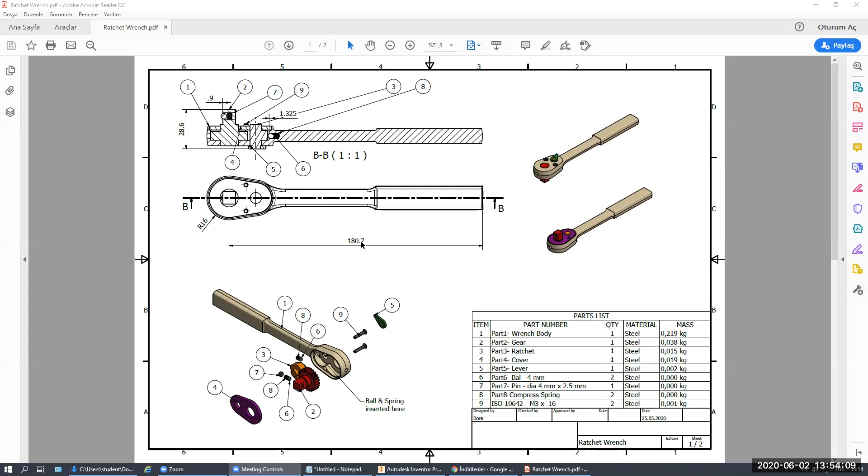I will just start the modeling. We have a sectional view here, the sectional view, and we have some dimensions in our figure. The first thing I'm going to do is create the model of the wrench body. I will just zoom in and have a look at our part here.

We have a draft angle projection here. As you see, when we have an extrusion, this extrusion goes sideways. We have a 7 millimeter - I mean 7 degree - draft angle according to the extrusion direction. This is our extrusion direction, and we have 7 degrees draft angle starting from the center point.

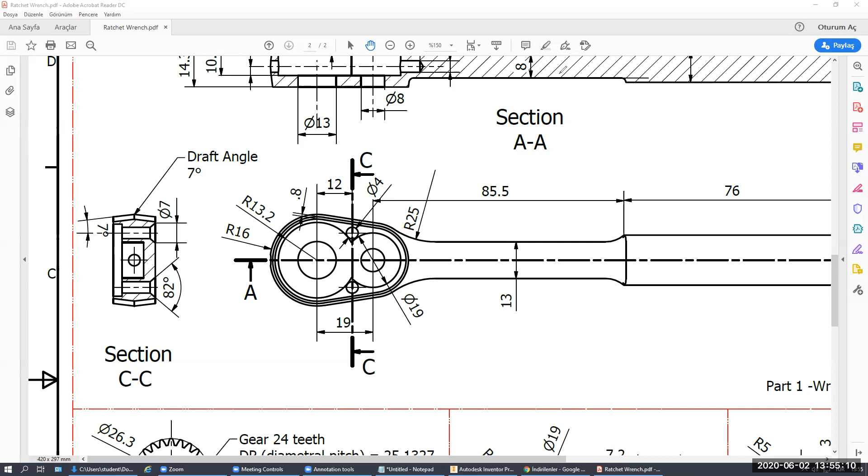As usual, I'm going to create a first sketch which represents our part. I will create a new sketch representing the main dimensions, then create some dimensions and other things according to our figure. I'm just going to adjust my sideways - I'll take the left side as our figure and right side as our Inventor software. I will again adjust some dimensions.

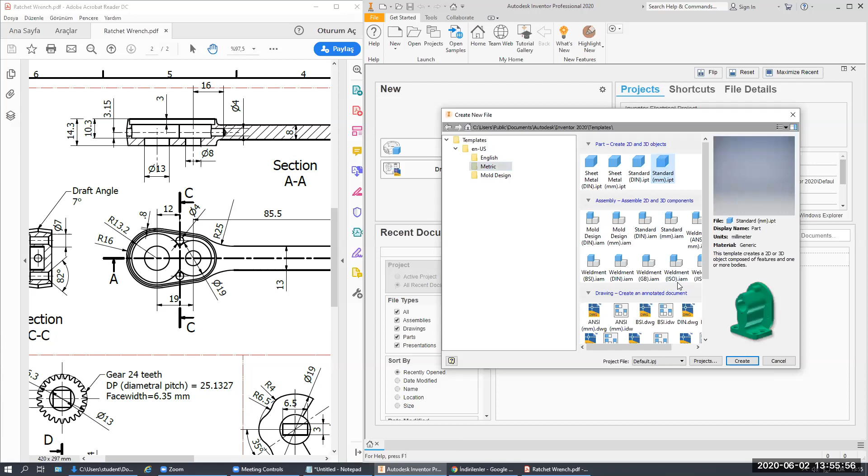Open a new part. This is a metric part - actually it was an inch part, so I have changed the dimensions of these parts. I will just start a new part. As usual, I'm going to select a center point for my figure, and I will choose this point as my center of our wrench body. I will just save.

I'll just choose this point as my sketch origin. Save my part file to the desktop. I'll create a new folder, Ratchet wrench. Sketch. The part 1, the wrench body.

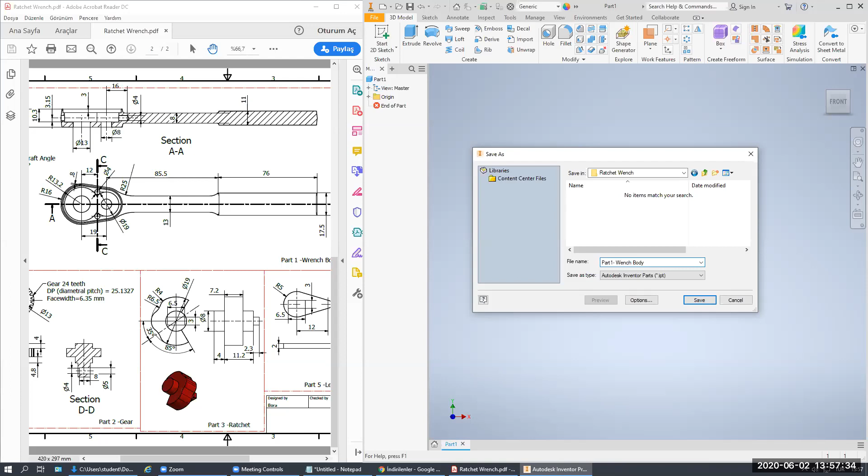Let me enlarge this folder just to see the visibility of the XY plane, to open the XY plane and center point visibilities. I will start a sketch on the XY plane.

The first thing I'm going to do is create two lines representing this center line axis. I will create two lines arbitrarily, having horizontal and vertical constraints. As you see, we have a horizontal constraint, and as you see, we have a vertical constraint. Here, I will make this line coincident at the origin point, and this line at the origin point as well.

What I'm going to do is create the dimensional relationships. These lines I'm not going to use directly - for this purpose, I will convert them by right-clicking and selecting construction. I will create one axis for this axis.

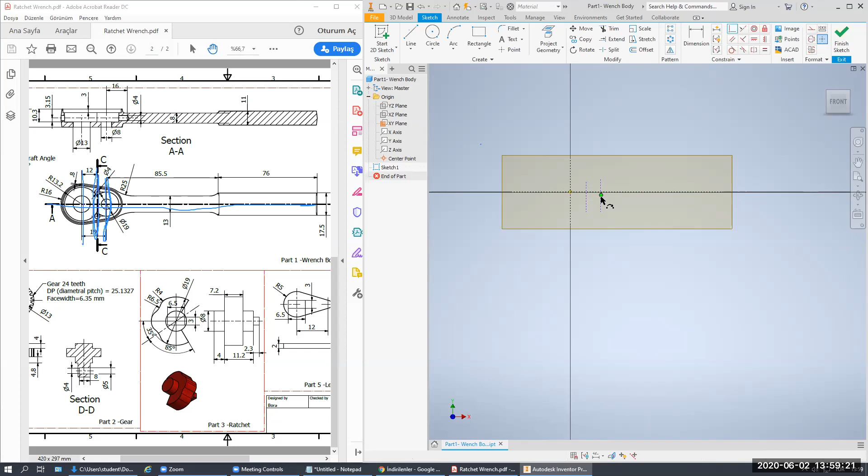You see, we have another center point here. Also, we have two bolt interfaces here. I'm also going to create a new line and make this line construction, and make the midpoints of these lines on these points. Here, I will create the first dimensions: 12 for this dimension, and we have a 19 from the point of origin here - 19 here. I will clear the annotations I've done so far.

I will just go inside to show you better what details we have. We also have some details - as you see, we have some dimensions and relationships.

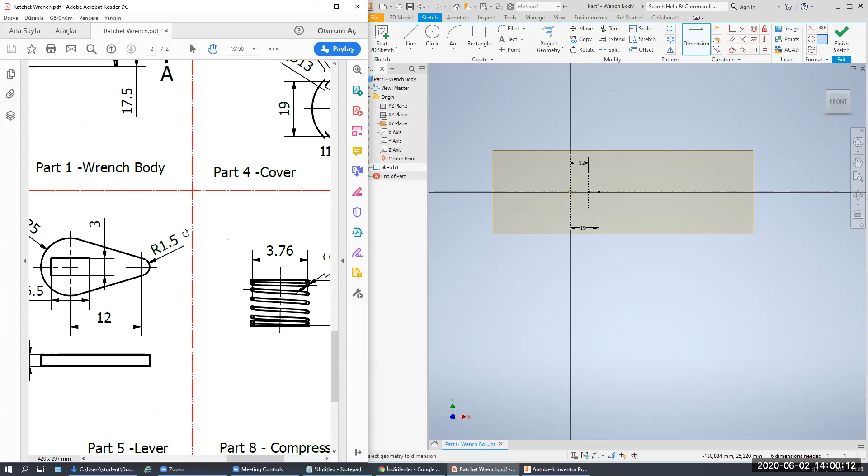Actually, I realized I have forgotten - we also have the bolt center dimensions, which are 19 millimeters far from each other. What I'm going to do is create an axis having a center point with the radius dimension. Right click - I have 16 millimeters. This is the dimension which I have seen here, the dimension I have created so far.

The next thing, we have another point here having these dimensions, also other critical dimensions.

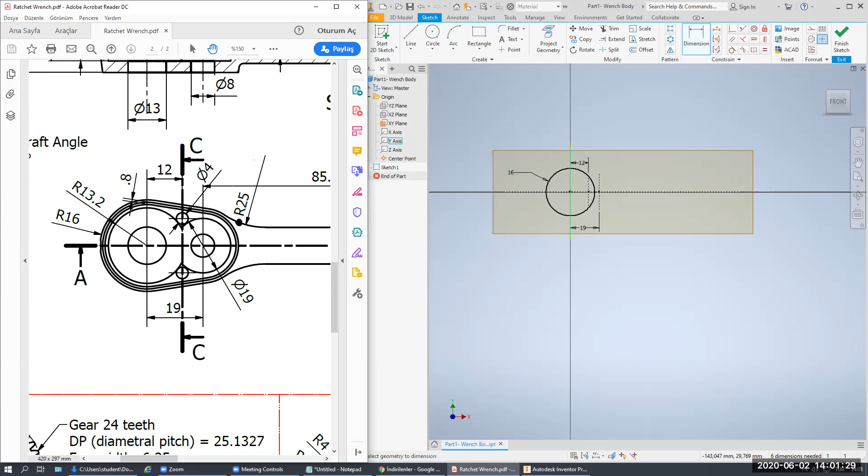We have a 16 and also some other dimensions so far: 19 millimeters, very much in thickness. We have 13 here, we have 19 here, and the offsets for all parts which just have those dimensions so far. Also, we can take these dimensions from the part of the cover of our wrench body.

Here, what I'm going to do is create another axis, which is 19. I will just zoom in and have this line, intersection, and I have this side. We have the diameter, it is 19.

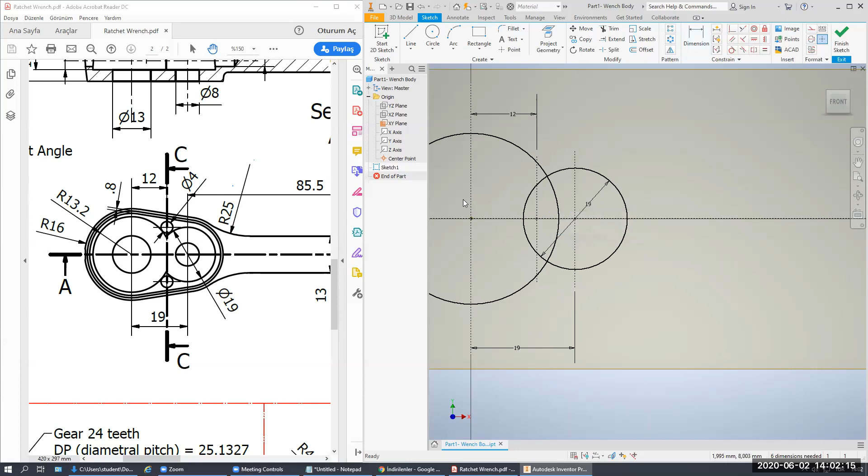And from the wrench body, we have an 11 millimeter radius and 14.2 millimeters. This is the body dimensions, and these are the cover dimensions. Also, we have some other details here. I will also adjust this one with the dimension radius 13.2 with the radius side.

And these lines, these circles are connected to each other, and we have parallel dimensions. These are the offsets of our body parts. I will just clear. This is the other outer dimension here. I have a tangent condition at this point. I will trim. And also we have 14, this is the 16, but we have...

14.2 millimeters. I will just create 14.2 millimeters with radius dimension. This is my 14.2 dimension. And also I will just delete this one.

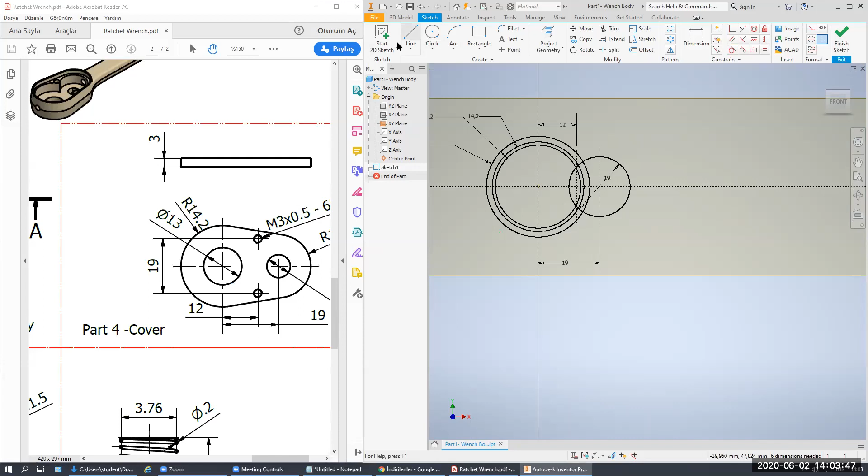Also for the inner part we have 11 with radius. Also these two circles, this one and this one, are connected with a tangent line. Again, tangent, this line to this line. We have just trimmed the unnecessary parts, so this part is also unnecessary.

We also have another dimension, as you see. We have 16 with 14.2. And for this, between these two circles, we have a distance about 1.8 millimeters. I will do the same thing for this circle and give this dimension, which is 1.8.

Also, we have another tangent line between these two circles. We have a trim dimensions. We have the same dimensions on the other side, but I'm going to use the mirror command for other circles. I will use this line as a mirror line and take to the other side these two tangent lines. I will use the mirror command, select this line as the mirror line, this line, apply and confirm.

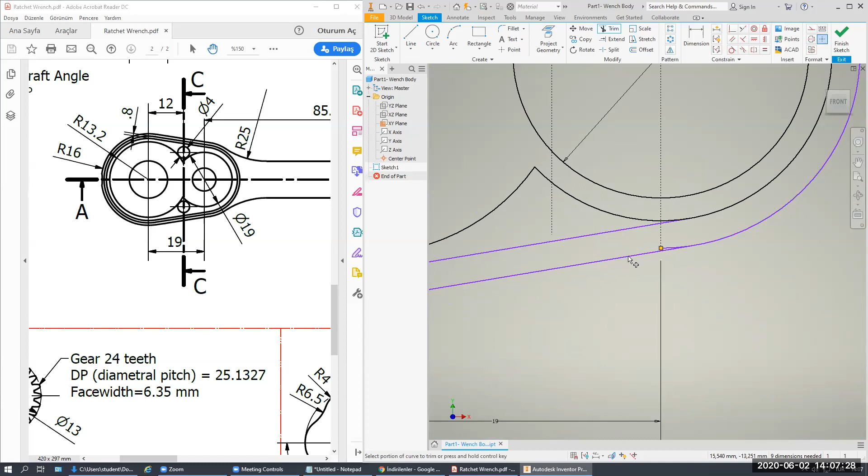Again, I will give the dimensions that I have. This one, also this one. I do not have any dimensions. Okay, this is a dimension. I'm sorry, I have just made a mistake here.

I will just make a trim. Also, this one I'm not interested in. I will extend this circle, and make the trims for unnecessary parts.

This is the internal feature, this is the outside feature. Also, we have two small circles which are here. As you see, we have two small circles. Also, we have two other small circles in this one.

The dimension between these two circles is 19, but they are symmetrical around this line. This point and this point are symmetrical around this line. And the dimensions of these holes are 4 millimeters. Also, I would like to just make it equal for the other side.

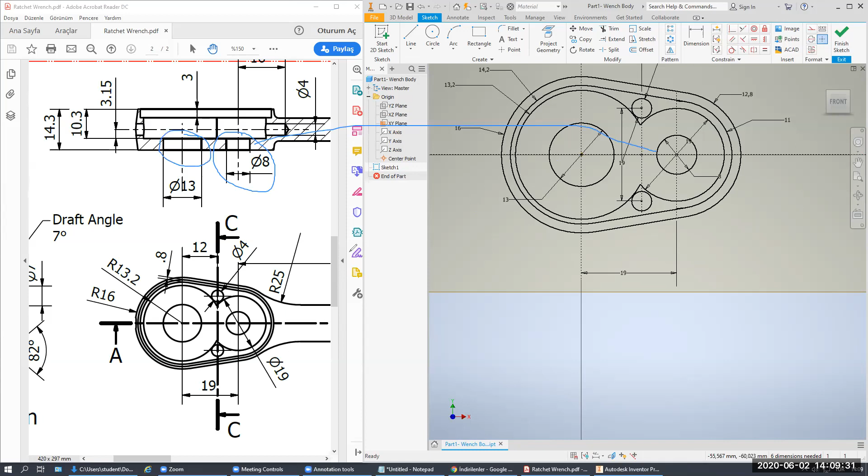We have all other details for our wrench body. From this point, we will have a continuation. From this center axis, we will just go 85.5. I will just draw two lines.

Also another line for representing these two lines. These are the lines that will be used for our sketch. Here we have the thickness for 13 millimeters between these two. I will give this distance 13.

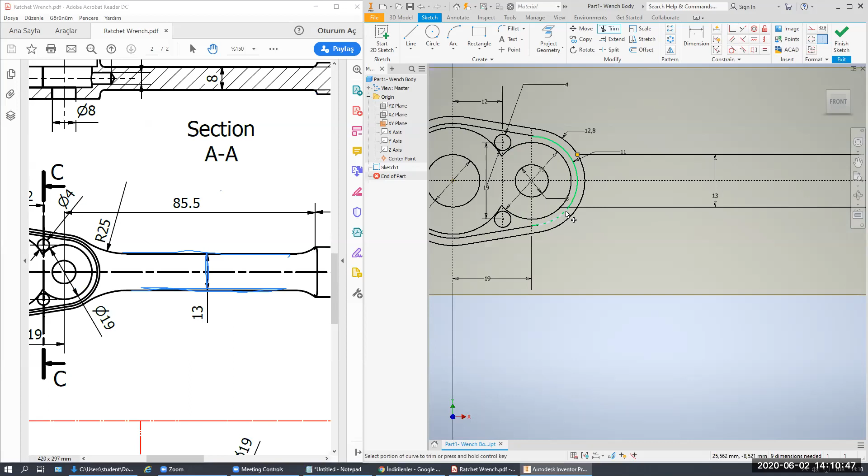And as I say, it's moving around this one. To prevent this, I will just use a symmetrical constraint around this axis line. This is symmetric around this line. And I will just trim the unnecessary parts of these two lines.

And this line is interrupted with a new line, which is 18.5, 85.5 millimeters far from this circle center. For this, I will extend these two lines, and I will just make the trims for our figure.

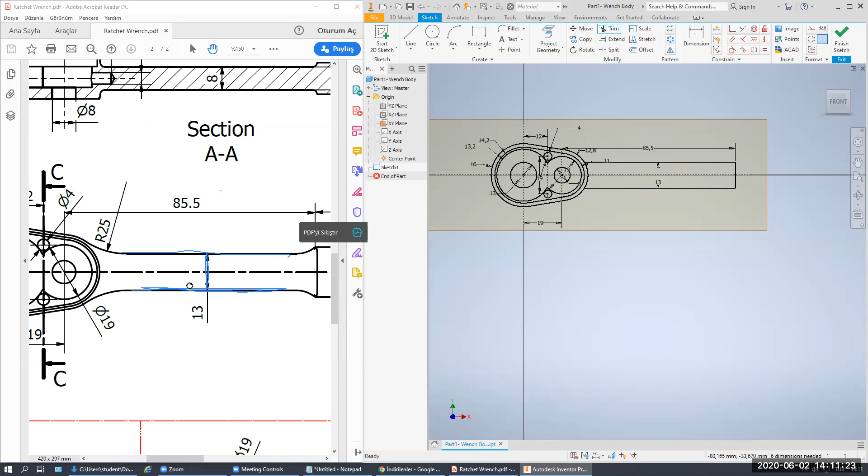The next thing, we have the handle part, and this handle part has a variation about its thickness side here, which is 17.5 millimeters. I will just clear all my parts here, and I will create, this time I'm going to use a rectangle, and I would like to keep the midpoint of this rectangle at this point.

And our rectangle shape is 76 millimeters in length, 76 millimeters in length, and its thickness is about 17.5 millimeters, as you see. Okay, we have just created our body part here.

Sorry, this portion. Okay, this is a sketch that we would like to create so far. This is our wrench body, and we will just create the sketches so far.

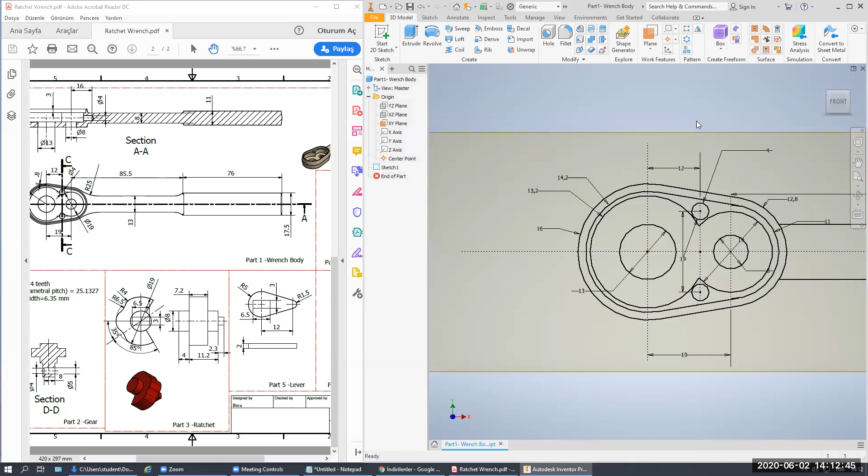Here we also have a small thickness inside, which is 0.8 millimeters. For this purpose, I will go inside and make an offset about this point. As you see where I made a mistake, I will correct it. Also this line, I will offset, and this offset distance between these two lines will be 0.8. Okay, this is our wrench body sketch so far.

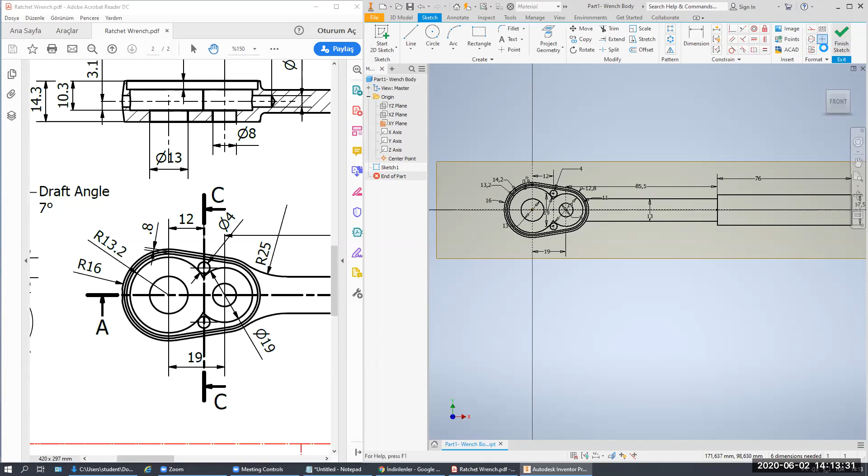Finish my sketch. What I'm going to do is the head of this wrench is 14.3 millimeters. I will select every single item in our sketch. For this, I'm not going to disturb this one.

I will create a new sketch on the XY plane and take the outer geometry of this circle body, which I have just created the projection. I will use this sketch for extrusion purposes.

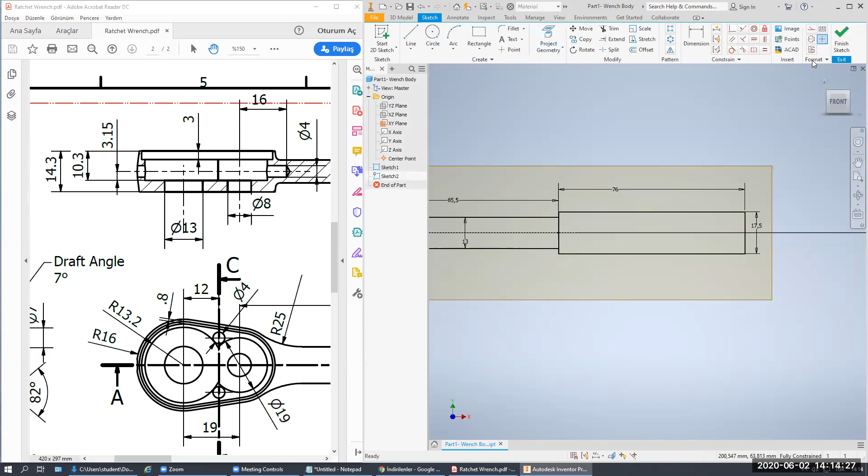Again, I will right click and open the visibility. I will again use these two lines and the rectangle on the end of this part. What I have done so far is this one.

I have created three different sections. We have three different sections: the head part is 14.3, the middle part is 8, and the handle part is 11 millimeters. We have all our details on the sketch.

For this, I will simplify the sketch for extrusion purposes. Finish my sketch. I have the extrude tool. I will select the head part and use a symmetric condition.

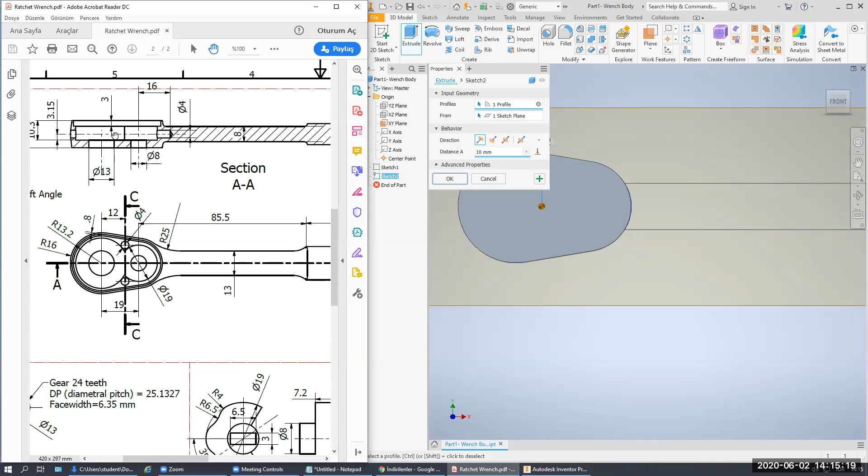This time I'm not going to use... I would like to keep my sketch on this surface between these two surfaces. I will use the symmetric condition and change my dimension to 14.3.

When I use this sketch in an extrusion feature, I will lose its visibility. To use it again, you have to share by having this visibility option on.

Again, for the midsection - I'm sorry, I made a mistake. For this extrusion, we would like to create a taper degree to have a shape with a draft angle. This is for forging and also casting purposes.

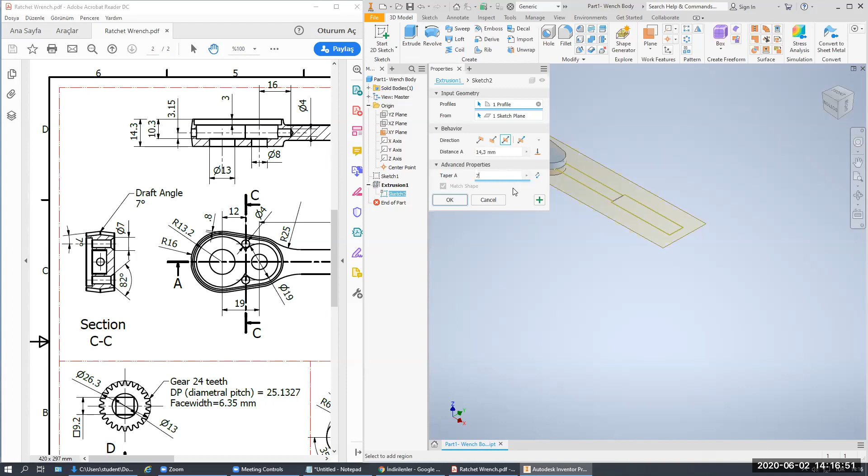We have created these angles to cover from the molding part easily after the casting or forging purposes. Here, what I'm going to do is make a taper with a draft angle. It is normally called 7 degrees here.

To show you what I'm doing, as you see, I have increased from 0 degrees to 7 degrees. But this time I am enlarging these top surfaces. For this, I will use the flip down direction.

Here, as you see, we will make the extrusion to inside with the draft angle, which you have seen in this point. As you see, we have a draft angle to outside and a draft angle to inside.

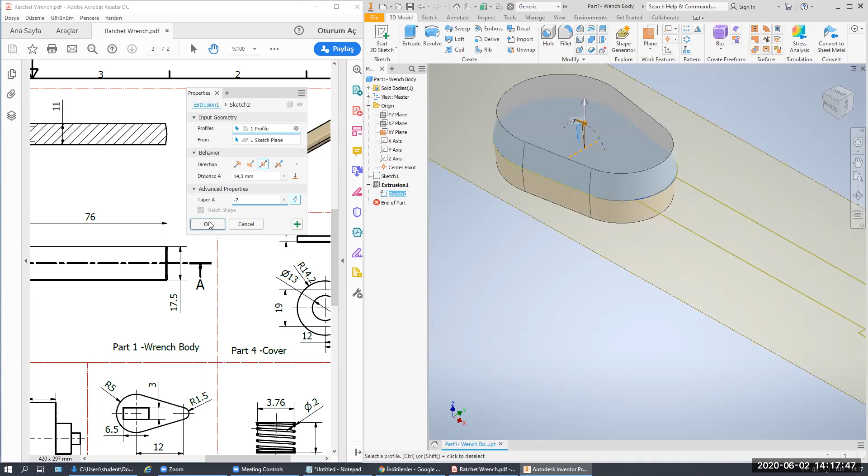As you see, you can also give this flip direction with -7 degrees. Okay, I will use this again for the midpoint.

I will use this midpoint, and the thickness of the midpoint here is 8 millimeters. It is an 8 with a 7 degree draft angle, with symmetric condition, and I will change the direction of this flip to inside. Okay.

Next thing, what I'm going to do is, as you see, when you give the draft angles, the connection between these two items got lost. We will heal this portion by filling a normal extrusion rather than the draft angle here. We will complete these items so they're not too drafted.

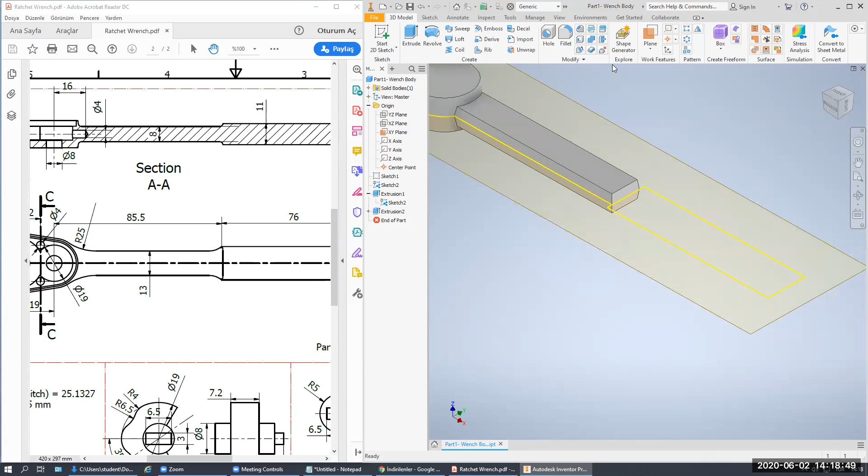We can also use this draft angle for giving the draft angle properties to our solid. For this one, we are going to use the last section with this draft tool, by using this draft tool.

We have, as you see, 11 millimeters in thickness, the last handle point. I'm not going to use a taper angle. I will use the draft angle.

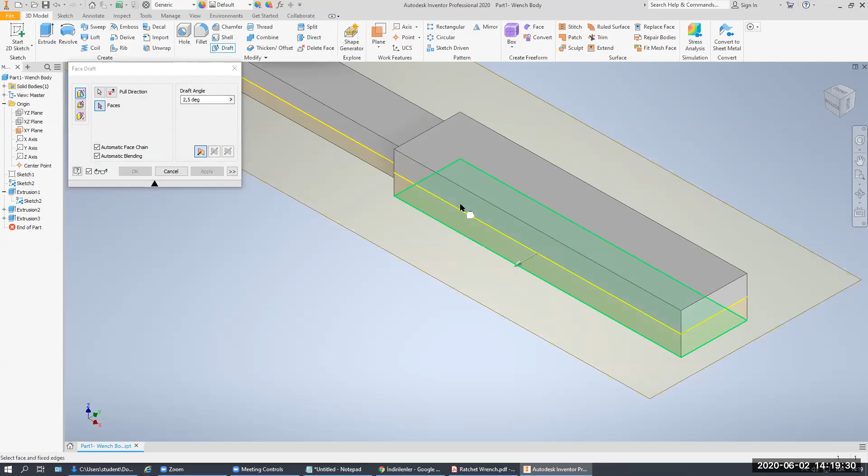This surface, and this surface - as you see, we can give draft angle. I'm sorry.

Again, just choose - this is the fixed edge, this is the fixed plane. We have many options: the parting line. I'm going to use this one. The parting surface here, it is the parting tool, and the pull angle direction to inside or outside.

The faces that I'm interested in are the inside. As you see, it is just going outside. The inside with 7 degrees.

I can just change the direction to inside or outside like this. Okay, you can choose the symmetry line. Again, 7. You can also change the angle here by giving the minus sign.

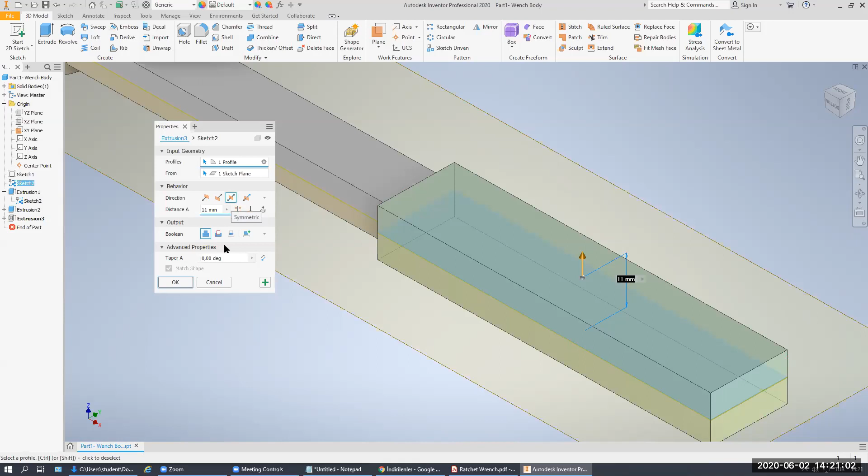About this feature here, starting your sketch on this surface with the F7 tool, I can just create a new rectangle tool just to heal these two portions.

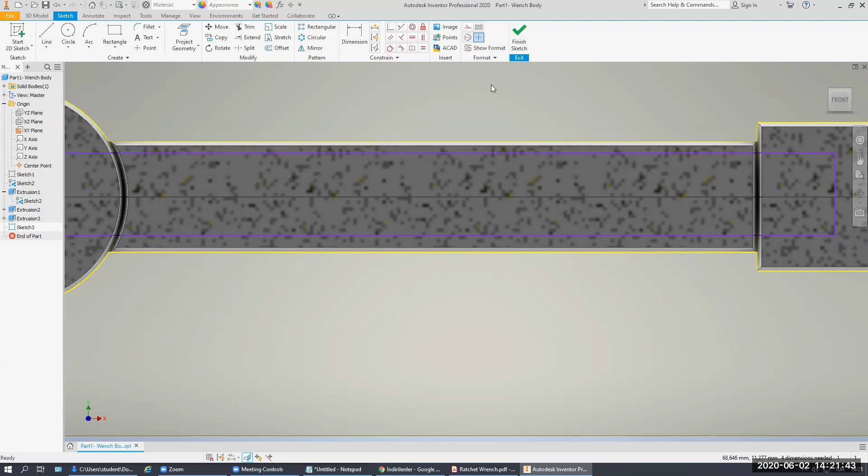I will use these portions to heal the connection between these lines. Also, I'm sorry, I will just take one back. I will use these geometries to heal the sections between the items.

We have some other tools. We will just create a circle tool. Also, I would just like to have a line. I will use this cross line tool to heal my figure, which I have.

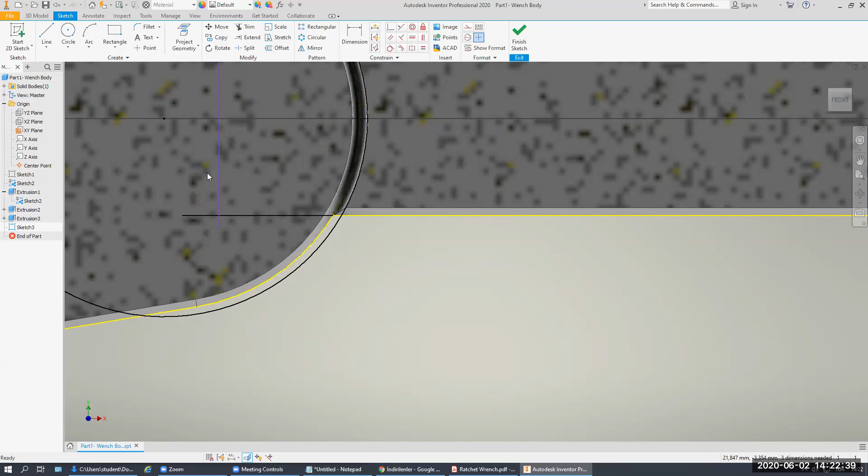From this point, I will use this point, this line here, here. I will just trim unnecessary parts.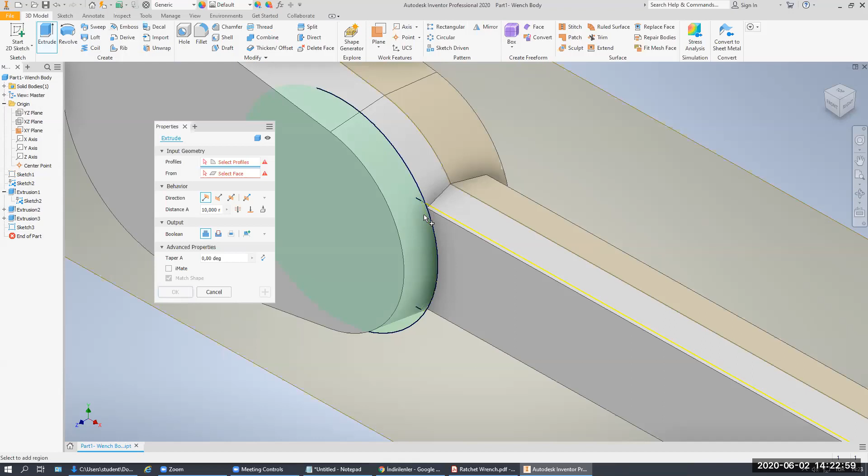I will use this first outline, I will use this portion for extrusion purposes. What I'm going to do is I will just create an extrusion tool inside. I'm sorry, again, I will just use.

Trim unnecessary parts. We have the F7 tool, I will use inside this figure here. Extrude tool. That's the first sketch using these. Extrude tool.

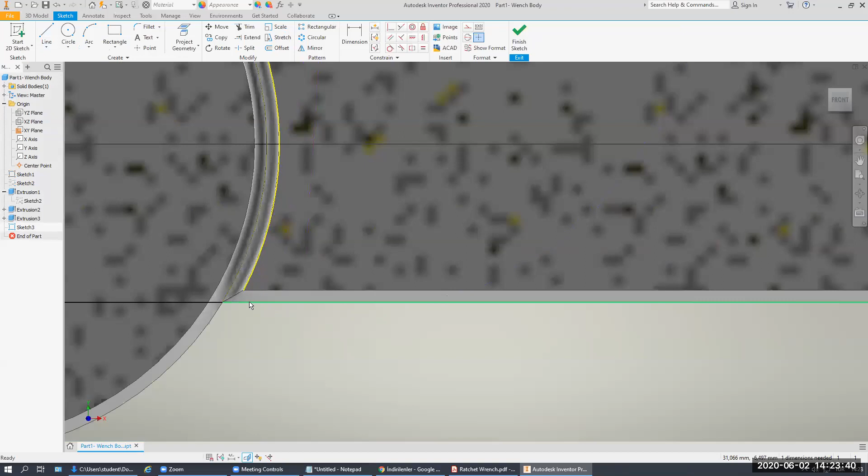Something upon this, we have the F7 tool. It's closed, this is not closed as you see. Project geometry, I will just close this one, and this geometry will be closed. Trim operations.

Okay, now the extrude tool. This time I will just heal the connection between these two portions.

Next thing, we are using the section tool up to the XY plane. I will just check to fill the gap inside. This time I will use the F7 tool, minus zero. Let's keep this distance to be 8.

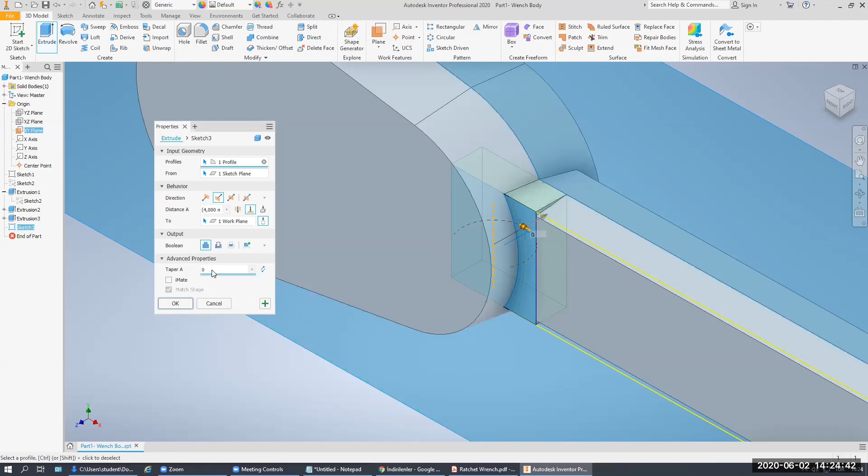I'll just connect these two lines, or you can just make a new extrusion between these two items. We have just done this time separately.

We can just, for these connections, we can just create the F7 tool. We can just connect two items. And this time I will just redefine and move this section to inside.

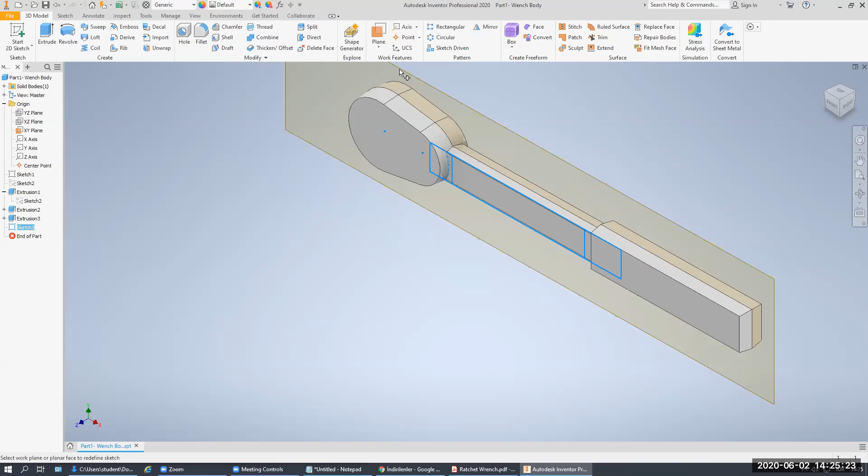We have the extrusion tool, and I will just heal the gaps, which is 8 millimeters. It's symmetrical with the draft angle 7 on each side. Just flip the dimensions, and I will just heal the connection between the items.

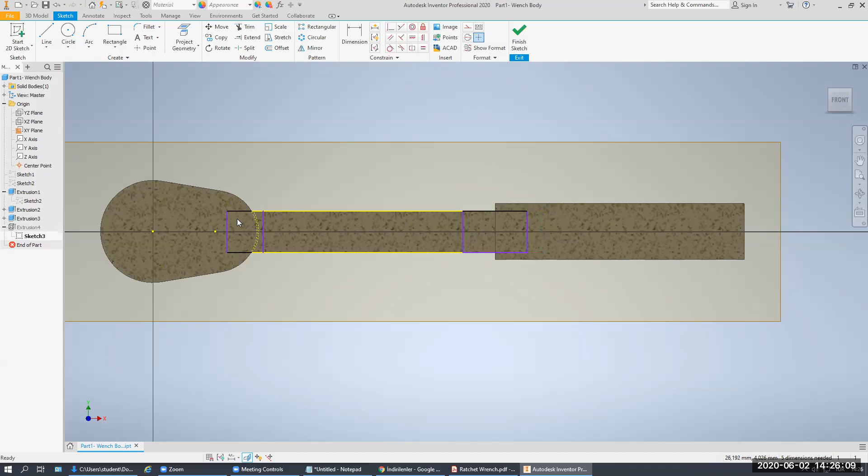As you see, when I just gave the extrusion here, we have just lost the connection separately. For this, I will just create a new extrusion to heal this connectivity. I will just use 2 rectangles to make them connected to each other.

The next thing, what I have is a fillet on each side, as you see. I will just use the fillet tool. I will change the dimension to 25. And this one, as you see.

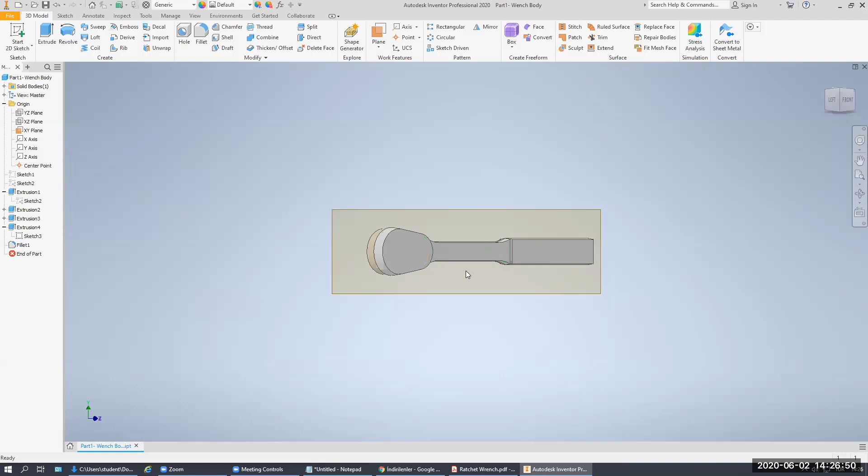Also this one, you see, on the other side it's not applied. Do that out, also this one. 2 fillets. When we look from the top side, we have 2 fillets.

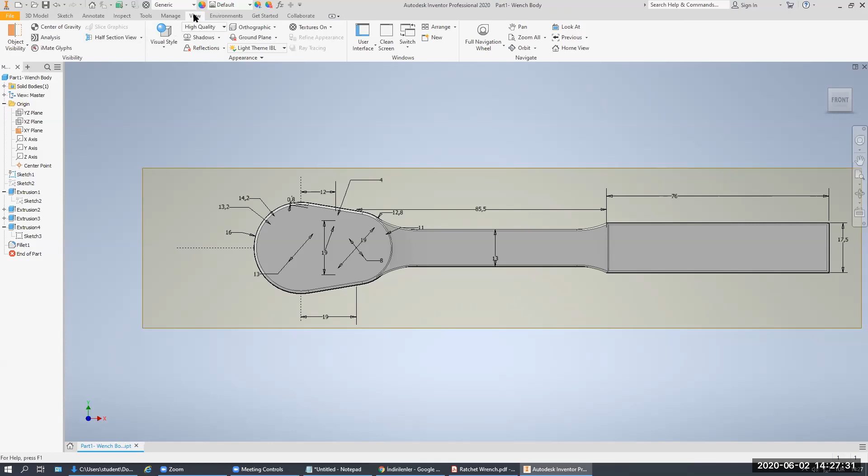What I want to see better, I will change my view from the view tab to the half section with the XY plane open. The next thing, I will just clear everything inside. I will just have an extrusion tool.

I will just create an extrusion cut, this time cut with a through all section. But this time I want to be sure that everything is clear in my section. I will change the half section view to an end section view. As you see, we have an outline in our figure.

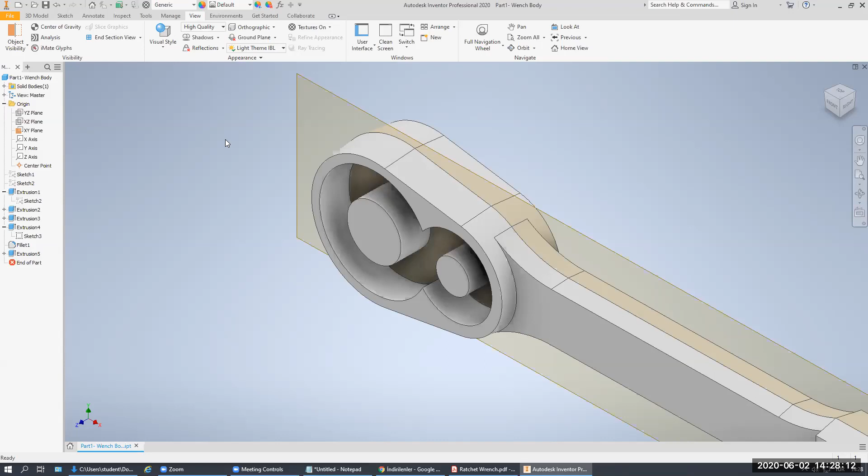Here, what I'm going to do is I will just again use the same sketch feature here to have the outline which our cover just sits on. For this, I will just start a new sketch on this face and hide the body to see my sketch here and have the geometries.

This is the circle for our body part. I will just get these parts. Okay, we have a thinner inside and the outside for our figure.

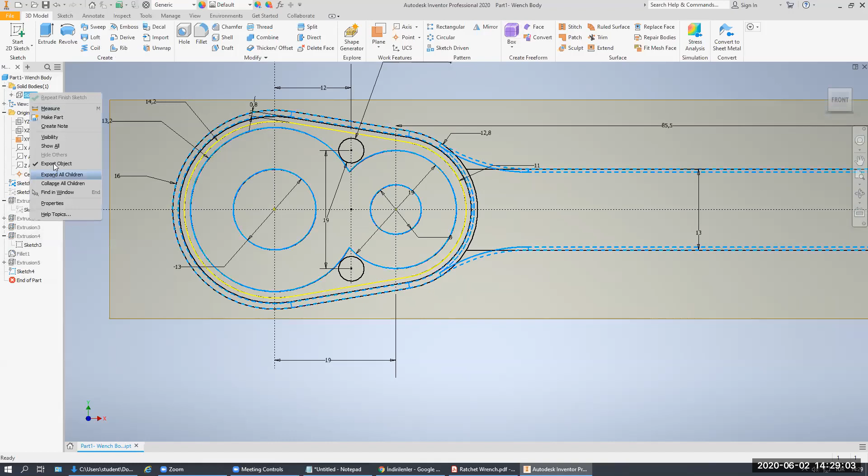We will just finish my sketch, open my second visibility body. I will just create that sketch on this surface. And I will just create a new extrusion tool, and this time we have a 3 millimeter thickness for our body part. I will use this figure with 3 millimeter thickness and change my direction to inside. It will just make a cut for my purposes.

Okay, the next thing, what I need is, we have 2 holes on our figure. Again, do the same things. I will just start an extrusion.

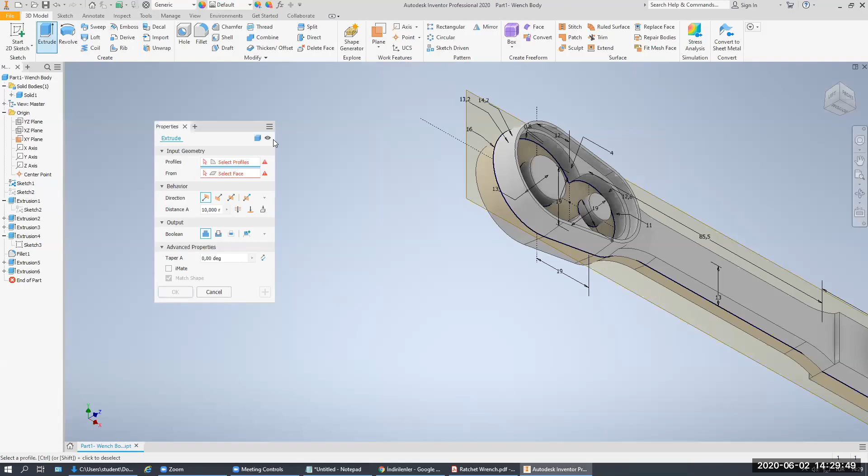Use these 2 circles with symmetrical and through all, but this time I'm just going to make a cut, to make again symmetrical condition to have also a hole on the back side as well.

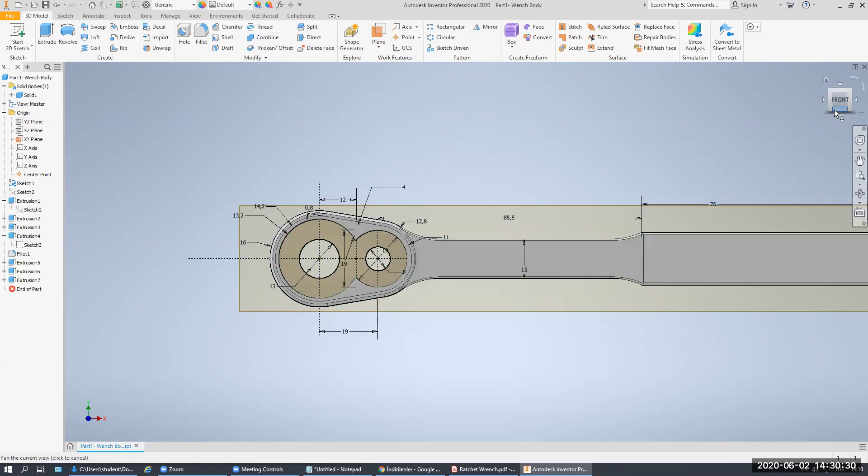The next thing, I have 2 holes for both connections, and as you see, we have 2 small holes, but the holes start from the back side of the figure. For this, I will just start a new sketch on the back face. I will hide the solid body visibility, project the geometries to get the points on the back side of our part.

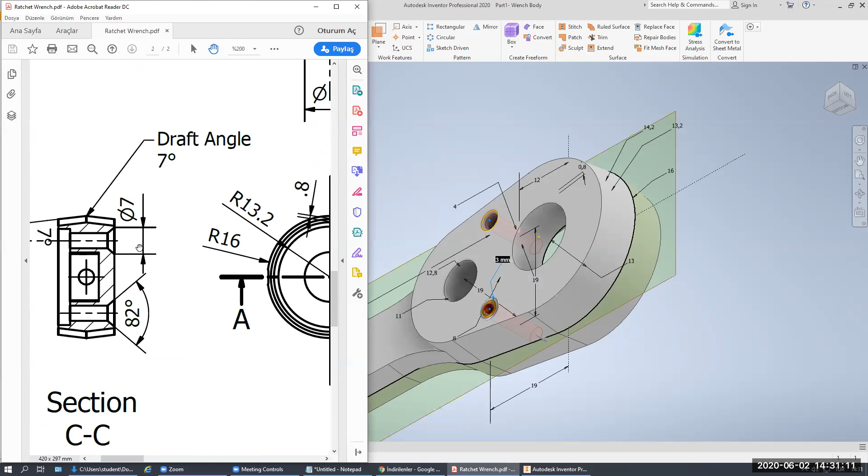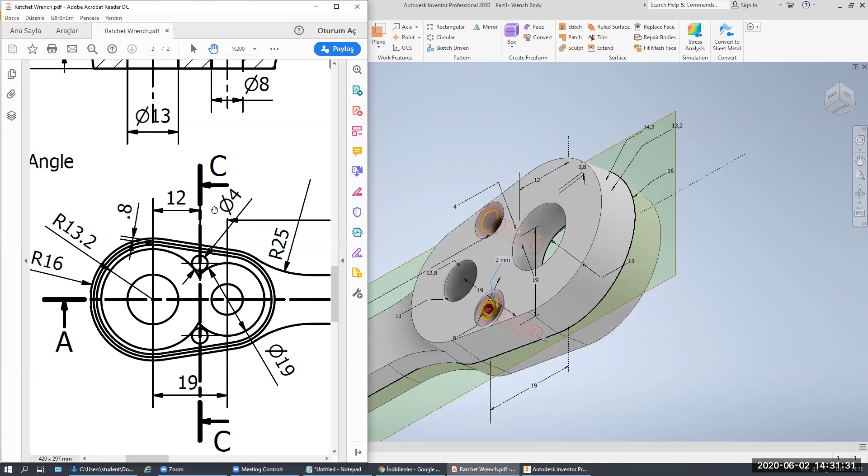I will create 2 holes at this point and this point. We are starting with a countersink, and our dimensions of these holes, as you see, we have 7 millimeters with 82 degrees - it is not 90, 82. This is 7 millimeter in thickness. Our hole dimension, as you see in this figure, is 4 millimeter.

Okay, the next thing, what I need is, I have some details about this part. As you see, we have a hole feature. Also, we need to just simplify this figure up to somewhere here. We use the midpoint, but we would like to be sure about this.

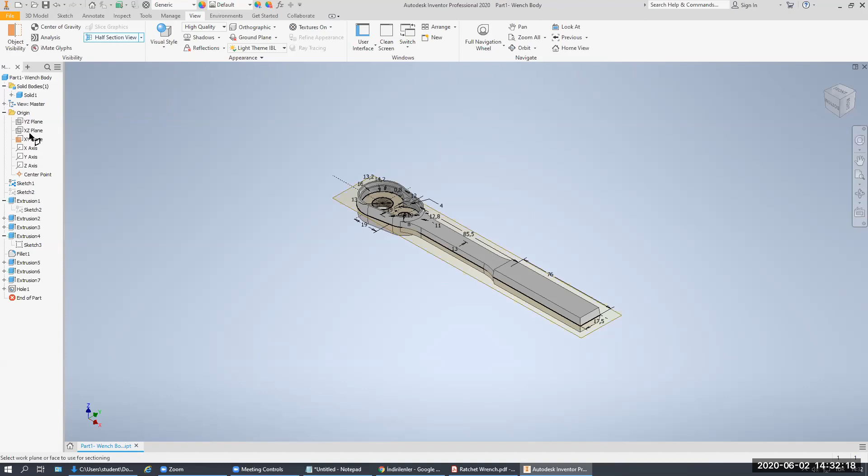If this is 10.3 millimeters - what I'm going to do is, I will just begin at the half section. At this time, I will use the XZ plane to check my figure.

As you see, we have some missing dimensions. When I compare these two figures, as you see, we have a missing cutting point here. For this, I will just create a new extrusion up to, from the top point, up to this point.

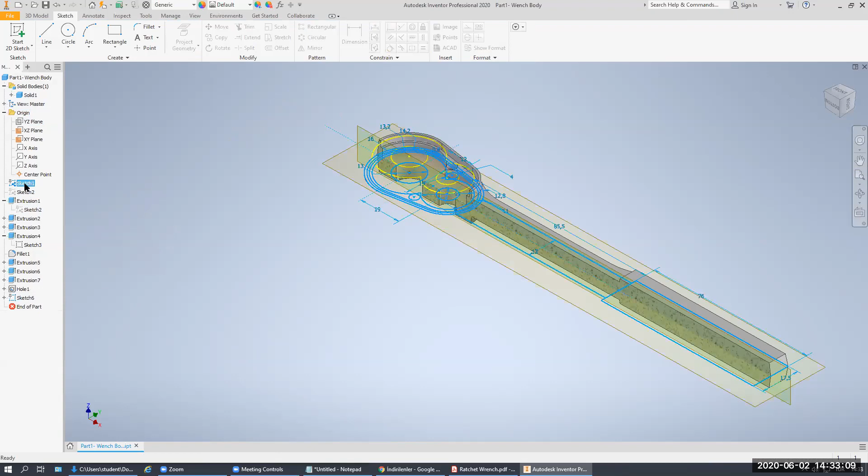Again, I will just create a new sketch at the top of this one, and I will use the same geometry which I have so far. As you see, I will just close my sketch visibility and have all the sections to be extruded.

This section, this one, and to be on the back side, and point 3, with a cut properties.

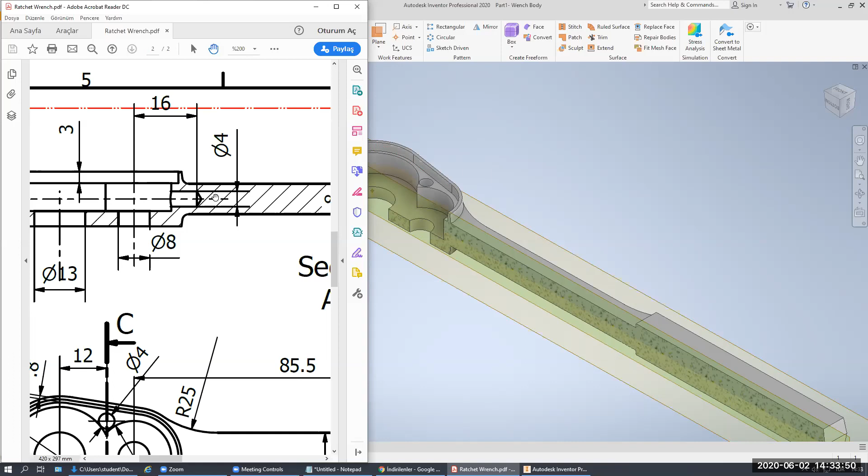Okay, next thing, what I need is, we are almost done with this part. We have a 3.50 millimeter far axis up to this point. We have a 4 millimeter diameter hole, which is 16 millimeter far from this one.

For this, we have two options. You can just create a new sketch and have the revolve tool. For here, I'm just going to use this line and create a midpoint line - a line passing at the midpoint of this projection geometry. It is at the center point of our figure.

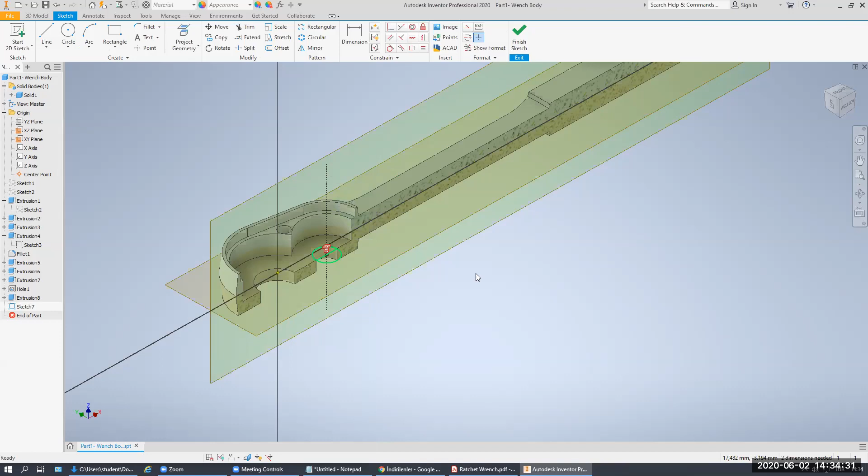I'm not going to use these lines, also construction. We have a line - this is our center axis line. I will just delete it. And this center axis is 3.15 millimeter far from this bottom line.

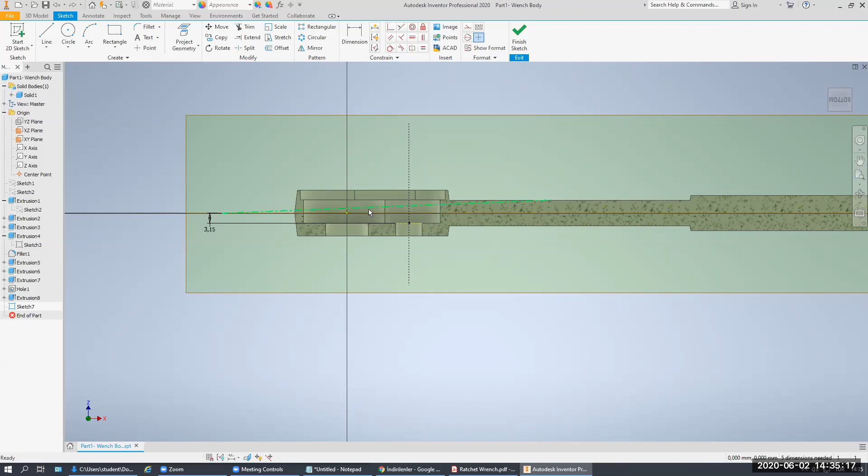It is 3.15, I'm sorry. I will just use this endpoint to give this line 3.15 far from this one. As you see, it is not horizontal. I will just use this vertical - I'm sorry, this horizontal line.

And I will use geometry, something like this. You can also create a geometry, something like this. Also, you can just use the mirror tool, using the mirror line. You can just engage this point on this line.

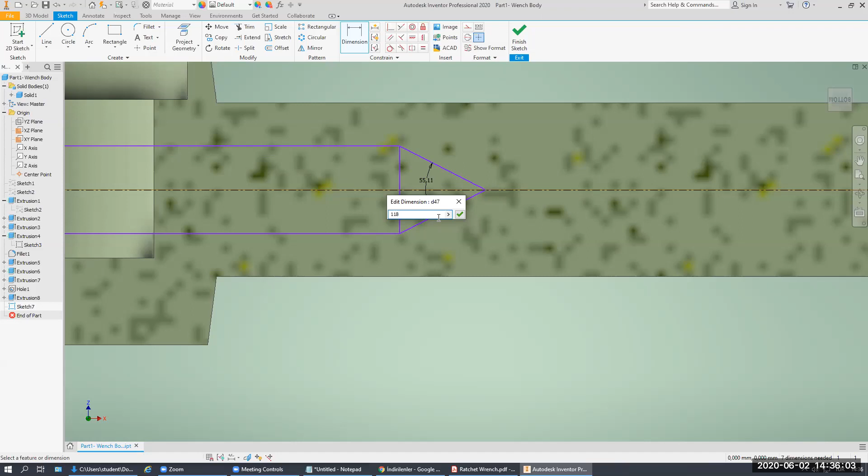As you see, the midpoint, the angle here for the drill angle, which is 118, and we have a dimension - as you see, we have a dimension with 4 millimeter, which is this one. We have a 4 millimeter diameter.

Now the drill goes to 16 millimeter far from this line. We have that line, and this line is 16 millimeter. Also, it is just up there.

Here, I do not need this part. This is a solid part. I have not converted it to construction. I will use only this section.

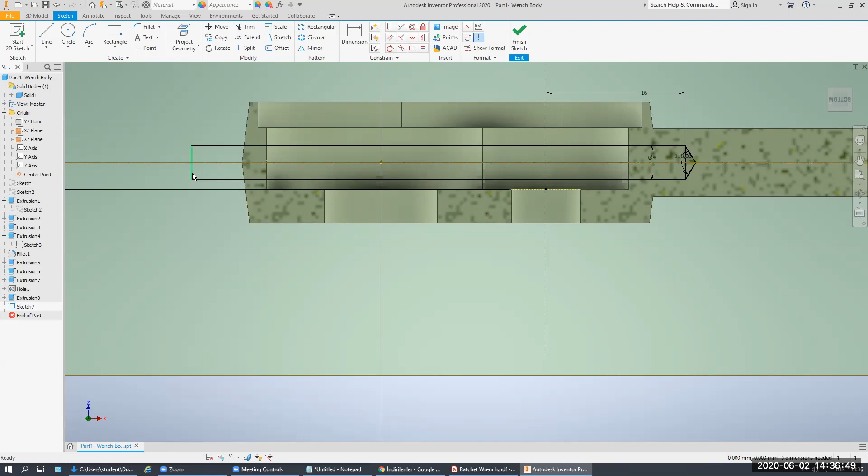For this, I will just make the pins, some dimensions. Also this one. Also convert this line, this to lines, construction. I will use this outline to be revolved around this axis.

I have the revolve tool. Select this profile, do not forget this one. Now this line, and I need a cut to revolve process of our figure.

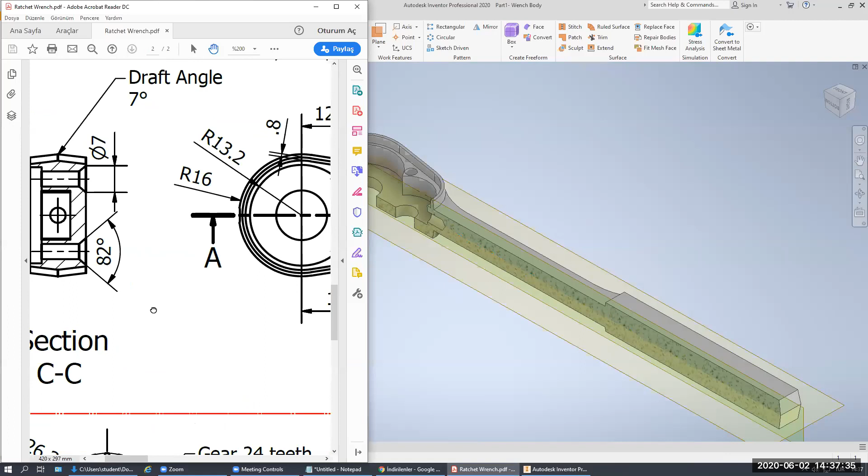Next thing, I'm just going to check if I have mislead some parts. So far, we have done everything on our part with our draft, and we have no part left.

I will just use the wrench body tools. We all have the material for steel parts. For this, I will use a steel part property from the steel, from the library parts.

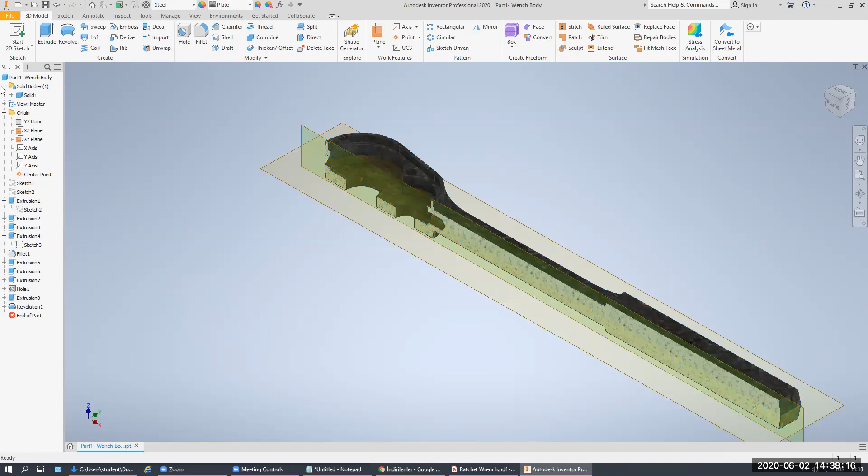I will use steel and change the body representation - sorry, this time red. I'm going to use this tool as a red one. Okay, I will save my part file body. I will use the end section view and close the XY plane and XYZ plane visibility.

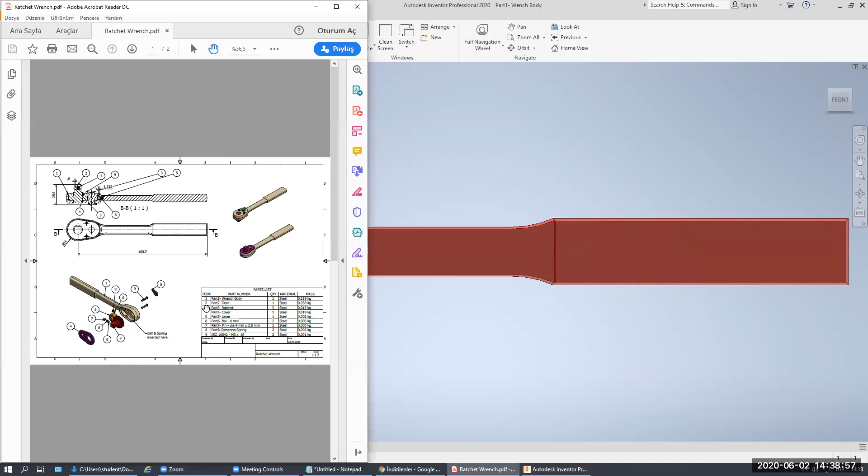Okay, I will just save my part. The next part, we have the gear part. For this gear part, we have to use the library parts. We have a gear tool with 24 teeth with a face width of 6.35

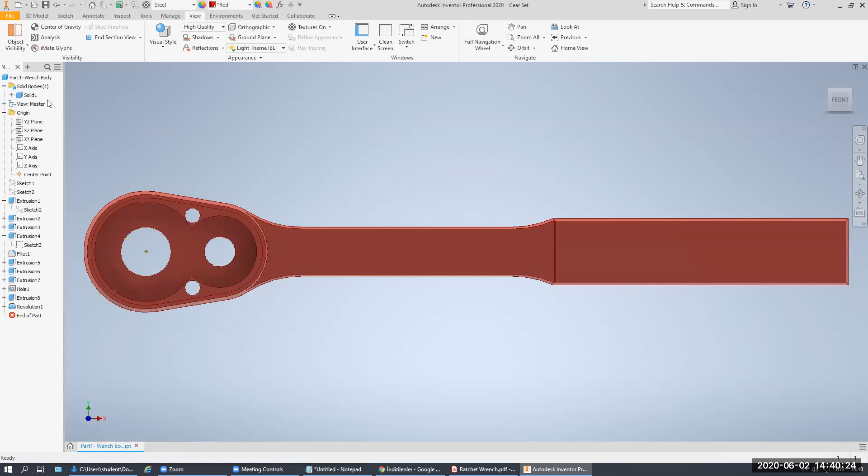I will use the spur gear tool, like this one. From this, I need a gear with the module here. Also, it is not a millimeter part, it's a DP part. For this, I made a mistake. I will use the English template, English standard millimetric inch here.

Again, save my gear set. Design tool, spur gear. I have just converted this diametral pitch dimension. I need a gear with 24 teeth with a face width of 6.35 millimeters. This is the millimeter, and I have to divide this by 25.4 millimeters.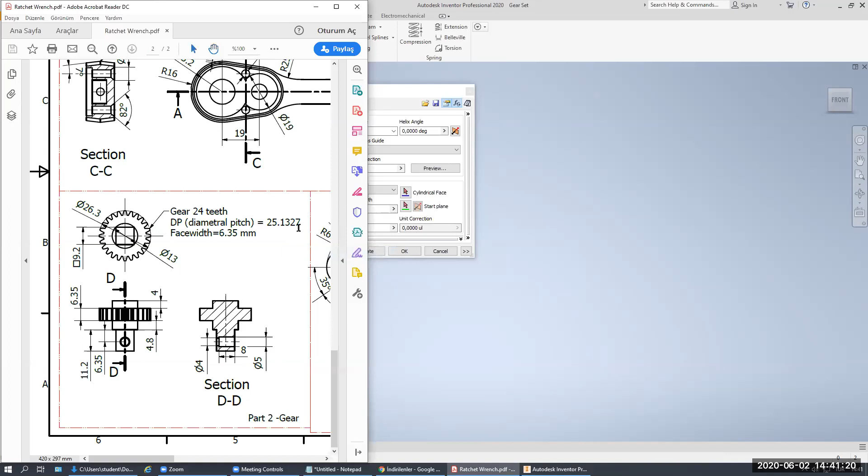Okay, also you can just create only with the millimeter tool. For diametral pitch dimensions, I'm going to use this number, 25.13, 26, 27. I'm sorry, I will just calculate. We have some warnings about the design failure, and it depends on our figure, which we have the calculation, but for the geometry, we do not have any ambiguity here.

I will just use this time the spur gear. This is the spur gear one. We have just used the gear one tool. I will just save this part file differently, part two with gear. Let's see, the display name will just be different. Hit OK, accept. I will just create two circles, two gear sets.

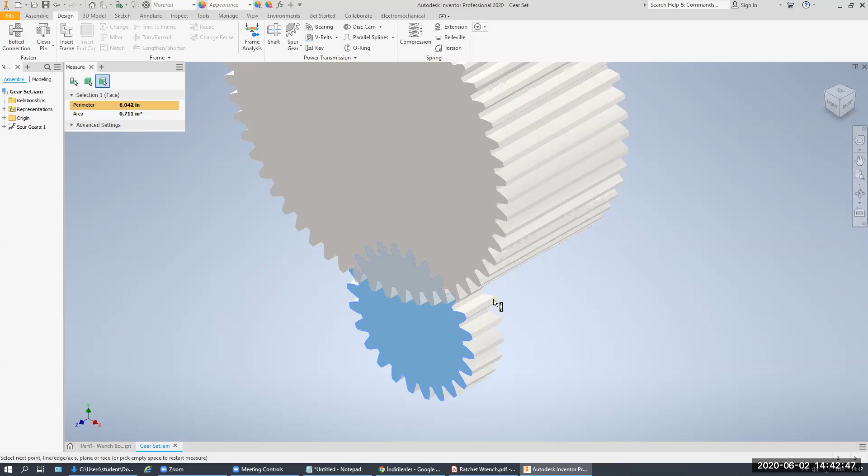Here, left click, I have just created one. I'm not going to use the biggest one, I'm interested in a smaller one. As you see, we have two gears. We're gonna measure side by side to this one, it is 0.25.

When you have changed your dimensions from the document settings, as you see, the millimeter tool, when you just measure these tools, as you see, it is 6.35 millimeters. Here, I will just save my part.

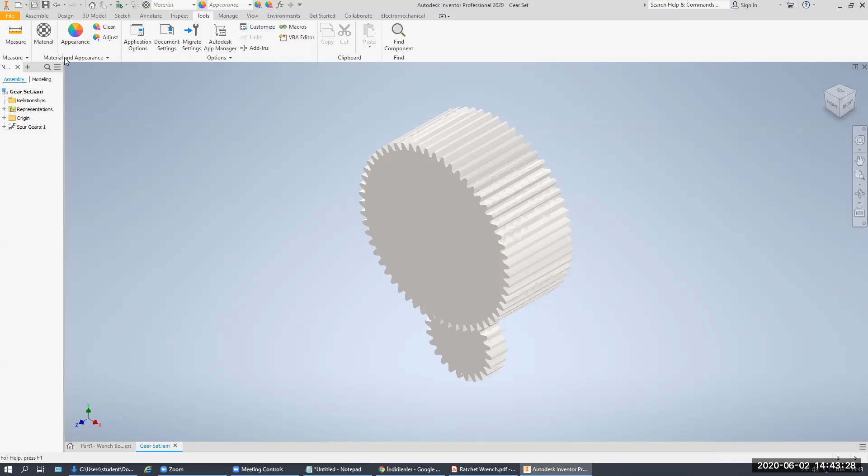As you see, we have also saved another part here, and I will use that gear set for modeling purposes. I will continue on that part, I will go for it. Just choose my gear set. As you see, we have a part wrench body, we have a gear set, we have a gear part.

I will just copy this file to my folders, and I will just use this one. I will close this gear set. I'm going to just model onto this part. I have the gear set here so far, and I will just create.

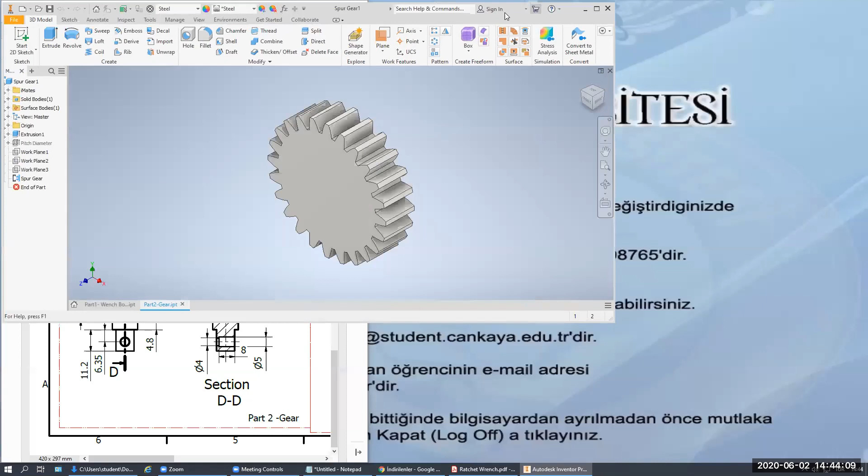We will just create a straight wall here. Also, we have some 4 millimeter thickness and 4.8 millimeter thickness here. We have a diameter with 13 millimeters. I started a new sketch on this one, a circle here, it will be 13.

And this time I'm going to change from the tools menu. I will just change the standard to ISO because I'm going to use the millimeter kilogram with SI units, which is this one, 13 in millimeters. As you see, let's finish my sketch. I have the extrusion tool.

As you see, it is 4 millimeters in thickness for this side. And I need an asymmetrical side, it is 4.8, with the thickness 6.35, which will just pass through this part, as you see.

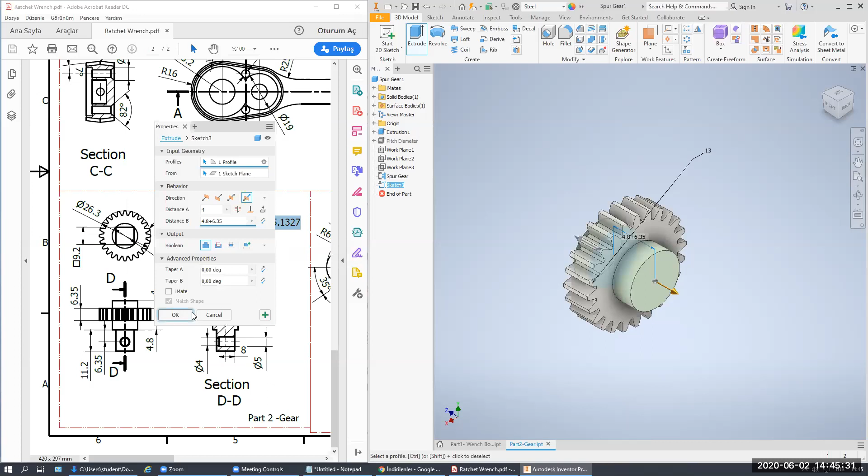When I just measure the faces, as you see, we have 4.8, which is this one, and we have 4 millimeter from this side. We have 4 millimeter of this side. The next thing, what I need is, we have a square bolt here.

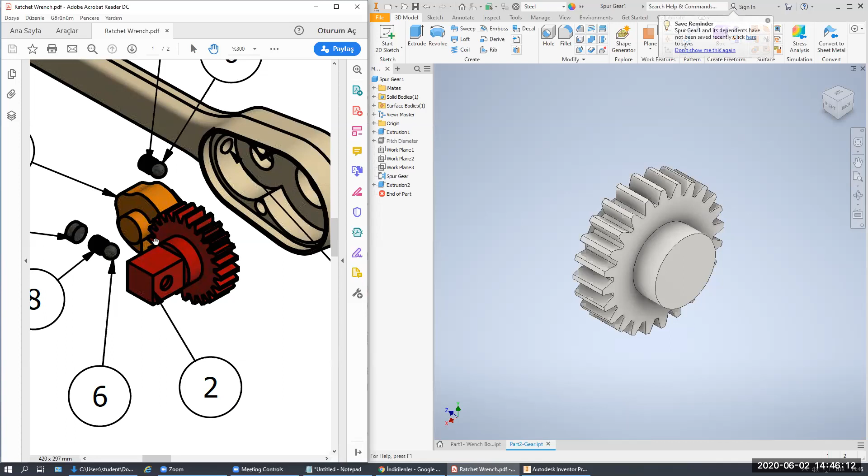As you see, we have in the body part, as you see, when you just go for it, I'm sorry, that's not the hand tool. Okay, we have a square at this point, and we have a spring and other parts. I will just create those parts for our figure.

I will start a new sketch on this one. For here, we have again a square dimension to be. I will use this time a rectangle with 2-point selection. I will use the midpoint here. I use 9.2 millimeters, and this time to be square, I have to equalize every corner about our figure. I will just finish my sketch.

I have the extrude tool with 11.2 millimeters. I'm sorry, I have the extrude tool, 11.2.

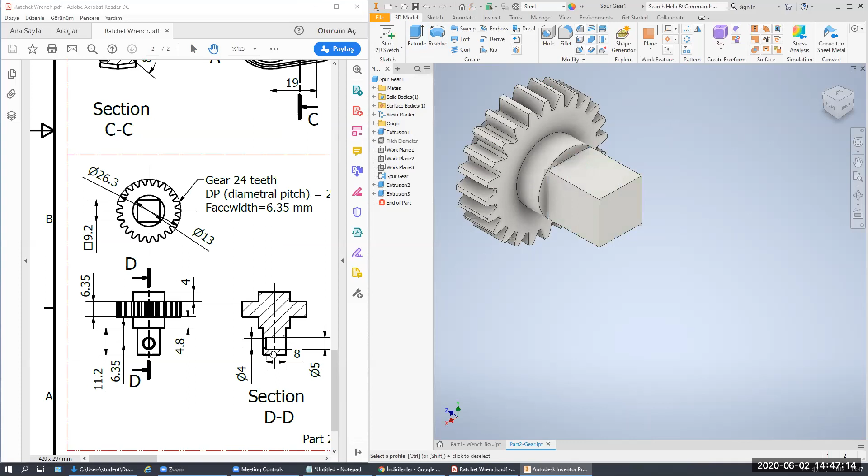This one. I would like to create, as you see, we have a cross section at this point. I would like to use the XZ plane for this figure. You can also use other planes, YZ plane or XY plane, to create this revolve tool.

You can also use some tools, but I'm going to use a revolve tool for my sectioning purposes. I will create a new sketch on this plane with the F7 tool. I will create two rectangles starting from this point.

Like this, I will convert one line to center line, not construction, center line. And I will use the tools here, which is 4 millimeter. This is also 5 millimeter. And this tool will just start, this distance is 8 millimeter.

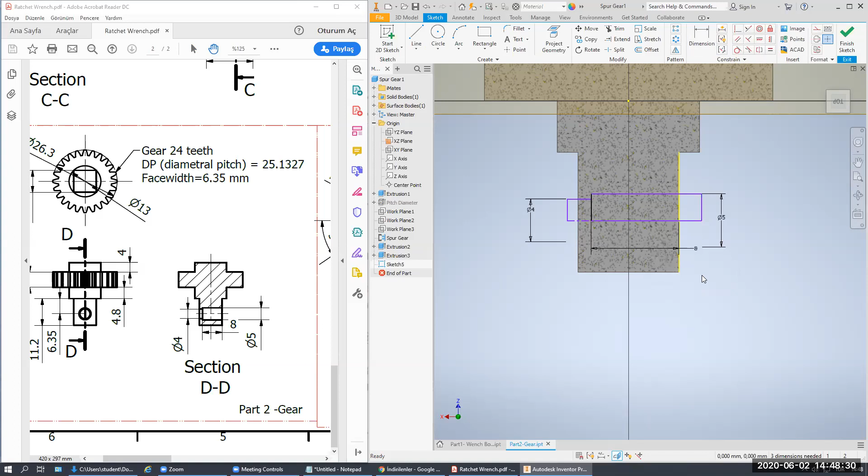And I will make the cut run around this point. As you see, we have another distance. The center line, I'm sorry, this tool, I have the distance with 6.35 millimeter far, to finish my sketch. I have the revolve tool.

Every section I'm dealing with, this time I will just make a cut around this. This is the part for our gear set. I will save this one.

The name that you have seen here, you can also change this one by copying the project part number, like Part2-Gear. And you save, you will just get that tool and reopen, or just recall your part to the assembly part.

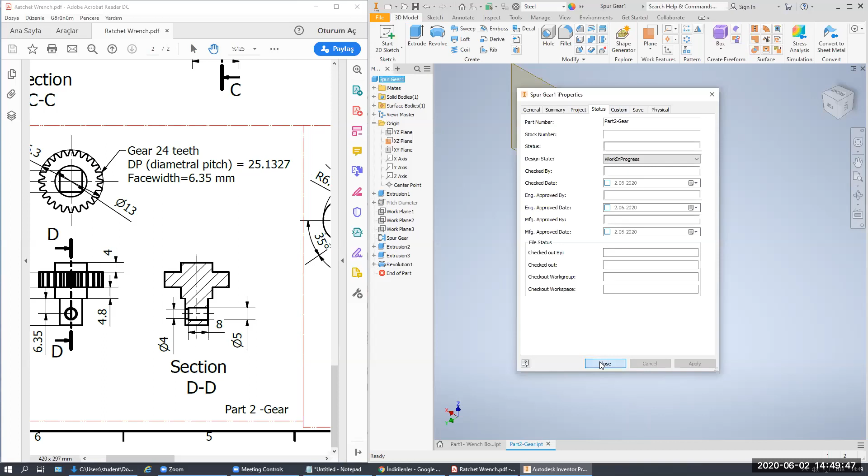What I'm going to do is close this one and save this one. The next part, we have a ratchet part here. You can also see the parts, in the ratchet, what this ratchet does in the normal assembly. It will also make the sound. You can use this for directional purposes of the working of the ratchet wrench.

I'm just going to open a new part. This time I will go to metric part again, standard with millimeter. Okay, this time I have forgotten one part to make the steel. Oh okay, it is the steel part. This time I'm going to change the color to yellow.

Okay, say the part 3. I'm not going to use this one. This is part 3 with ratchet.

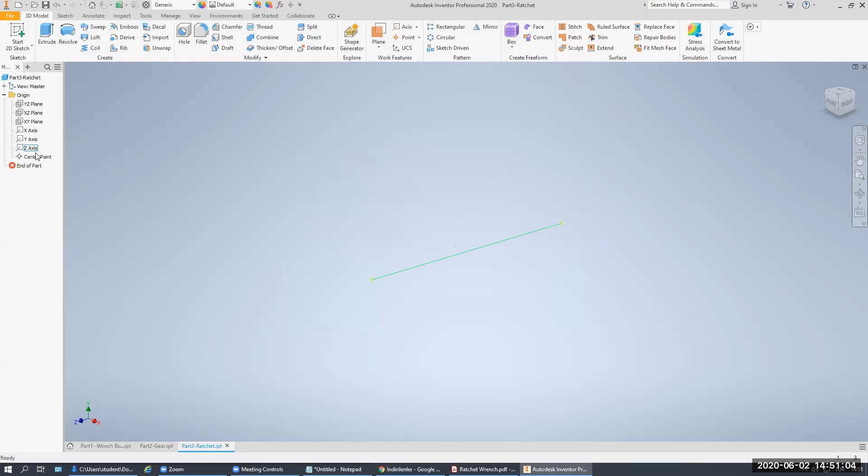Open the XY plane center point visibilities, start a new sketch, add 2 lines, convert these lines to construction and next stick to the origin point.

Okay, I'll change it by side. I will just make what I have seen in this technical drawing. I will first create a new part file, also create a new line. For axis purposes, I'm going to use this line passing through this one, which is 35 degrees. We have an outline which is 4 millimeter, these fillets, and also we have an outline which is 19.

This is my part. Also we have the curvature, as you see here, with 6.5 millimeters. For this, I will use an arc here with the radius.

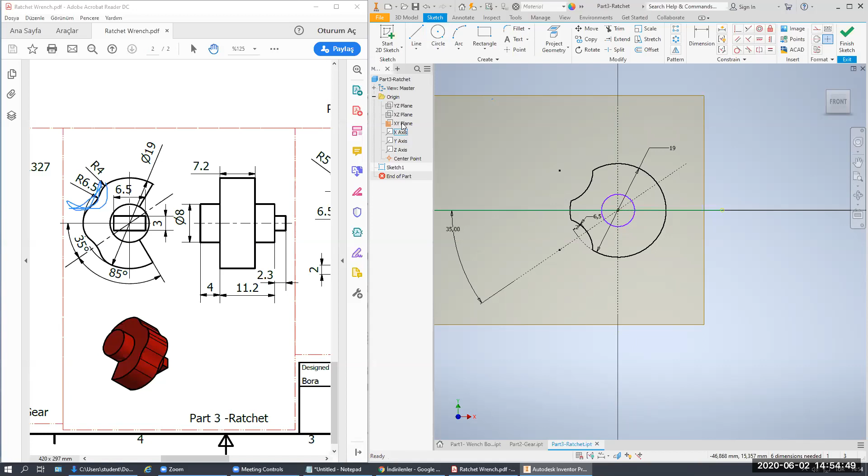Okay, the next thing I need is these two circles and one rectangle with this option. As you see, we have 6.5 for this rectangle and 3 millimeter in thickness. Also 8 millimeter in diameter, which is this one. Also, we have some cut sections around this point, which is 85 degrees.

I will just create two lines, actually one line so far. Here, what I'm going to do is I will make this dimension for 85, and I'm now going to use this one for trim. I have just trimmed, also trim for the other side.

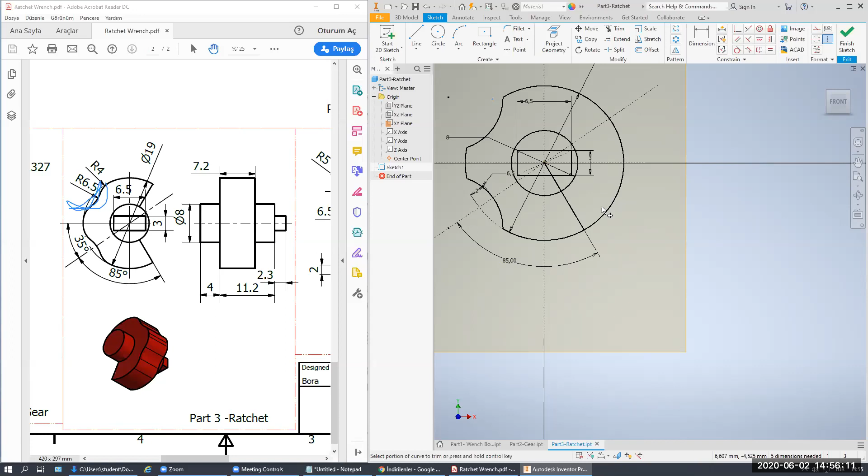As you see, when I have just trimmed, you can sometimes use the split. I need another line on the other side as well, and I would like to keep line input between these two inputs. I would like to keep the collinearity between this center, and then convert this to construction. I need this line on the other side.